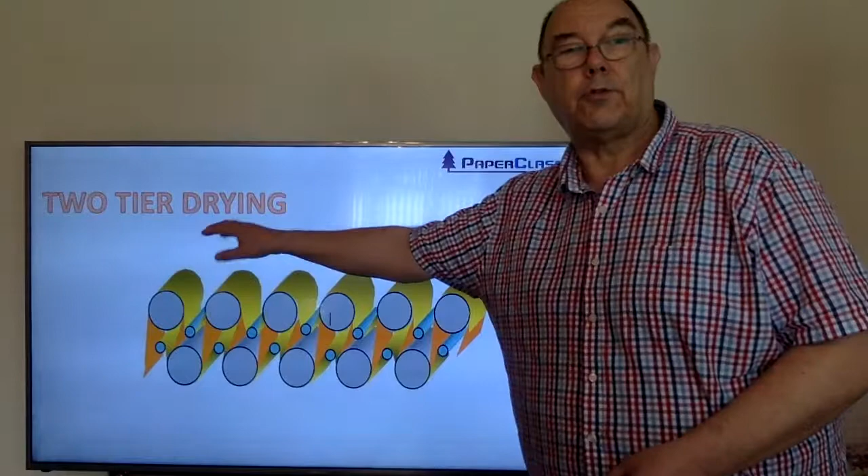In this session we're going to talk about two-tier drying. In an earlier video we've talked about single-tier drying. This is a typical two-tier drying system. We have a top row of drying cylinders with a drying felt on that, keeping the sheet pressed against the top side of the surface. And we have a bottom row of drying cylinders with another felt keeping the sheet on the bottom surface.

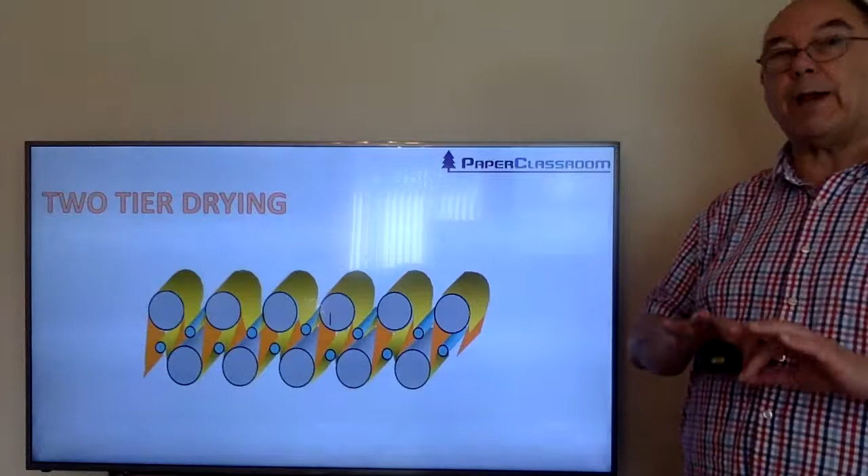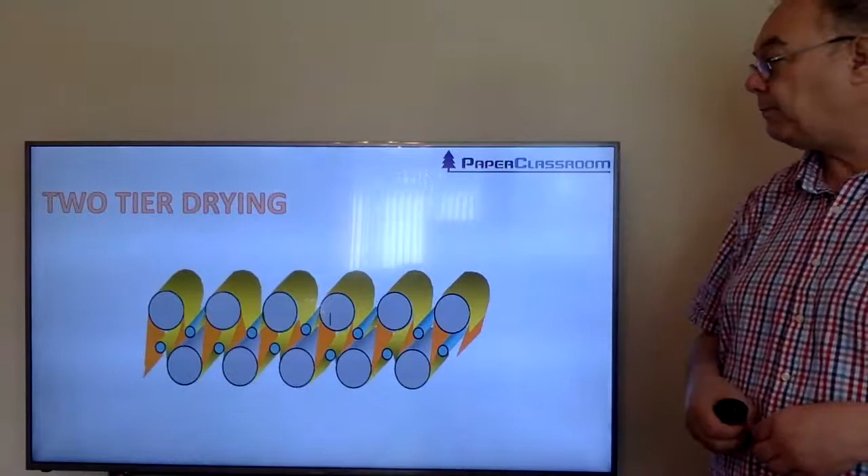Two-tier drying has many advantages and disadvantages. The pockets here and here are a disadvantage because they hold humid air, and unless you make a positive action to get rid of that humid air, it will inhibit drying. You've got open draws here where the sheet can shrink and potentially break if the tension becomes too great. But you've also got good things, like you do dry the sheet on alternate sides and therefore you get a more one-sided sheet.

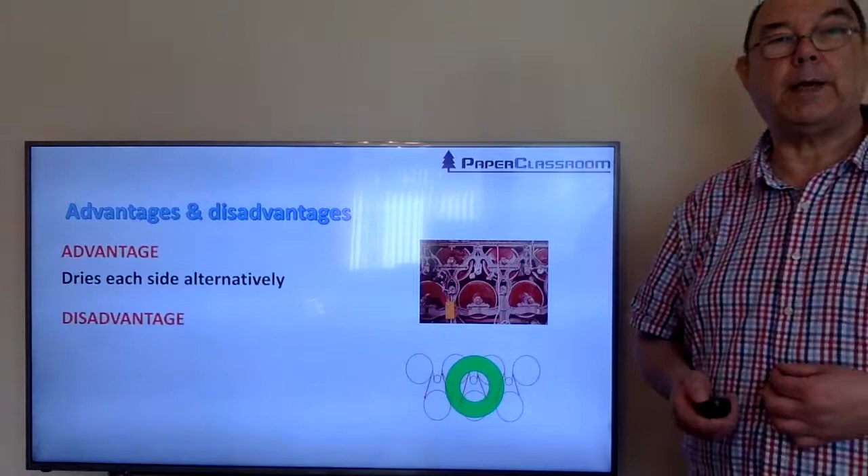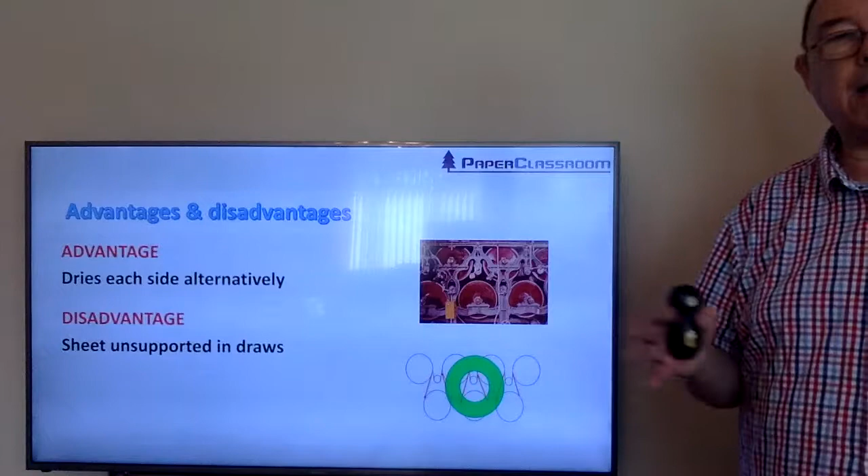So let's talk about these advantages. The main advantage is it dries each side alternately all the way through the system, giving you a nice one-sided sheet of paper. The disadvantage is the sheet's unsupported in the draws here, so potentially it can break. You can get this edge flapping effect that we've talked about in other videos.

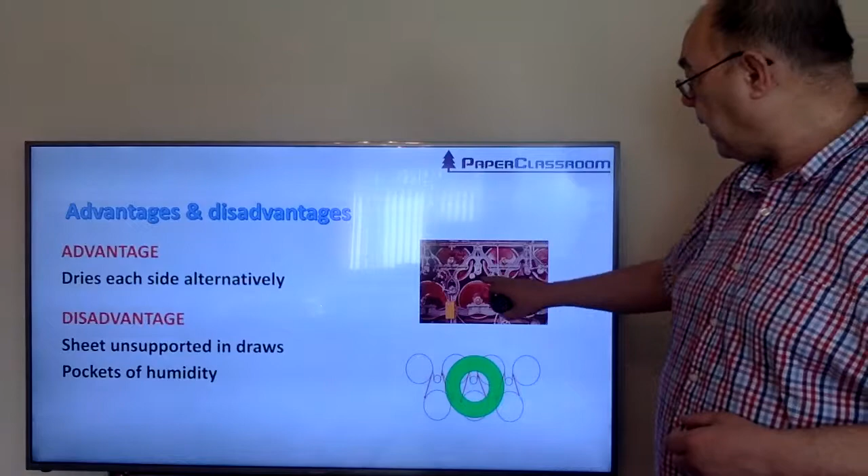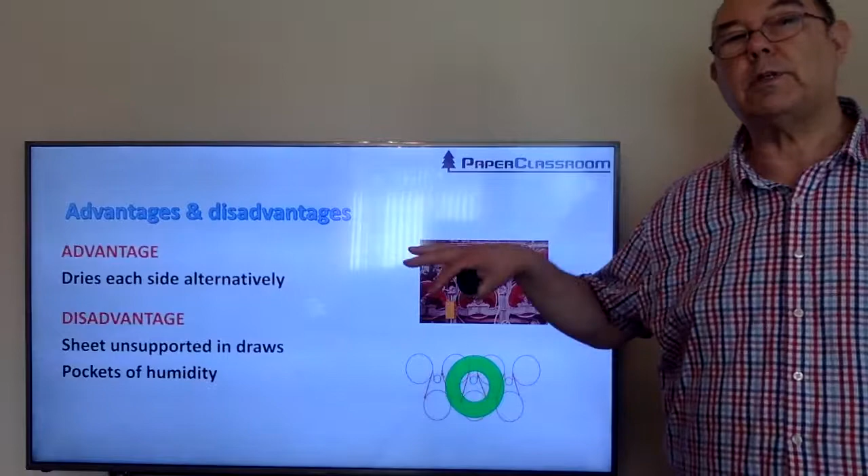There are pockets of humidity, so between here and there and here you've got a bounded pocket. In the case of top drying, you have a top drying cylinder, you've got two sheets of paper, and there you've got a felt roll and the felt, and that space in between the moisture can't get out of unless you deliberately put in something like a pocket ventilation device to push it out. So those pockets of high humidity will inhibit the drying, inhibit the removal of water from the sheet into that space.

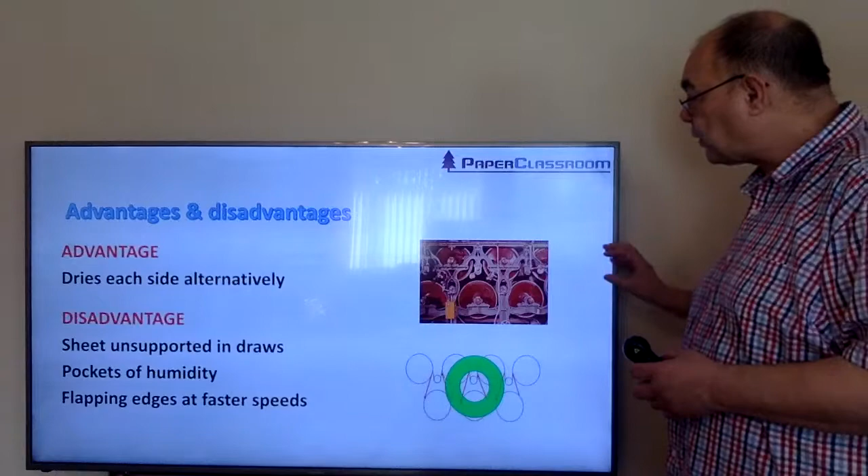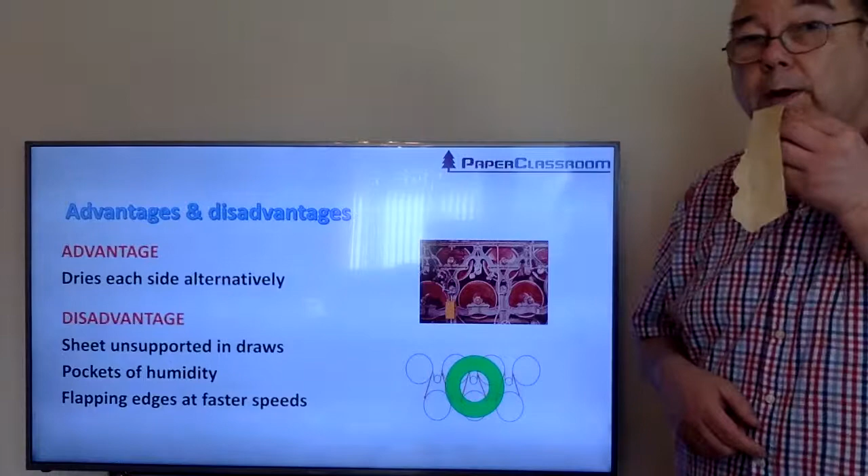Flapping edges is another problem. In these open draws, if you're going fast, then air can pass through the dry fabric, hit the surface of the paper, move along the surface, and as the air moves along the surface, it will cause a lifting effect. Let me give you a little example. If you've got some paper there and air blowing over it, it lifts it up.

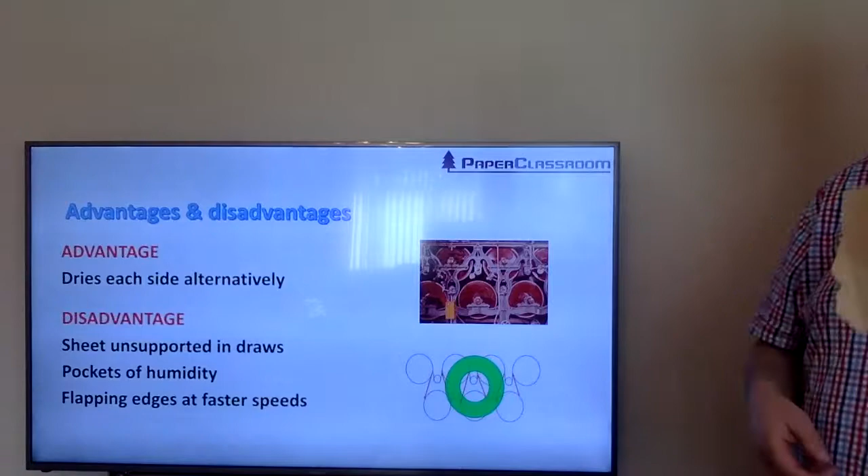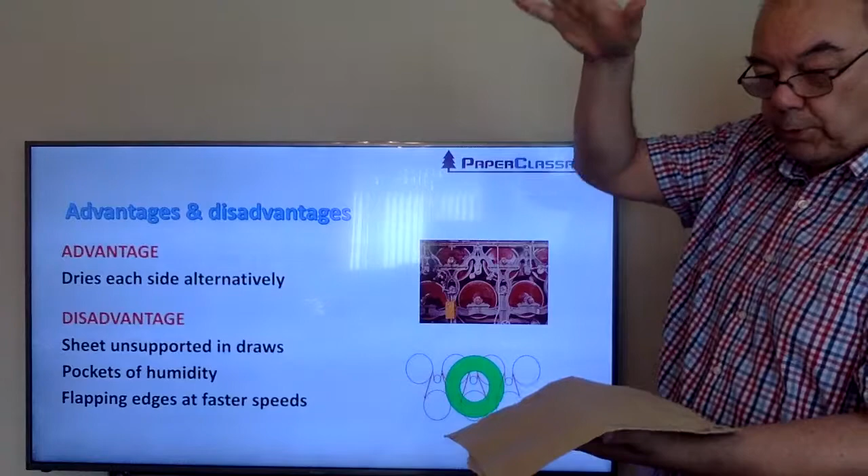Same phenomenon as flying, as keeping an aeroplane afloat in the sky. As air passes over it, it will cause a lift. A similar thing happens with your sheet of paper. If you've got the sheet of paper, the air will come through the dry fabric, hit the sheet of paper, move left and right, and as the air blows over the paper, you'll get these flapping edges. And if the edge flaps wildly enough, then the sheet will break.

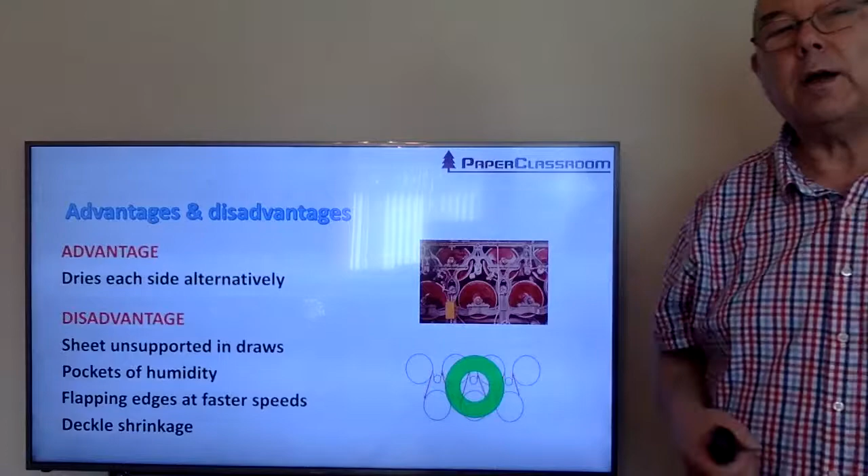The final thing to talk about is deckle shrinkage. While the sheet is being held firmly on the surface of the drying cylinder, it will dry but it won't shrink, provided you've got really good dry tensions. In these open draws between the cylinders, although you're pulling the paper and stopping it shrinking in the machine direction, there's absolutely nothing you can do about cross direction shrinkage. So it's in these draws that all the cross direction shrinkage occurs.

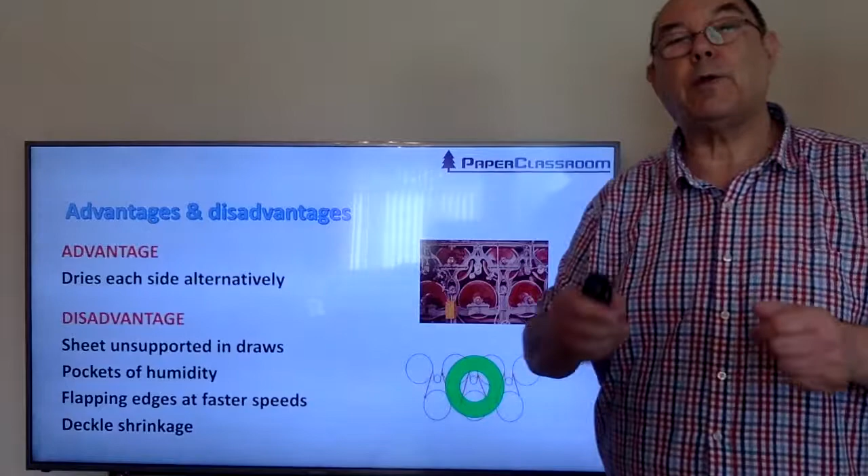Now we look at the features of two-tier drying cylinders or systems. We'll talk about these in more detail in other videos, but we've got the felt systems to consider. There are two particular felt systems we need to talk about. One is the use of slalom felts, and slalom felts eventually led people to the idea of single-tier drying systems. There's also another system where we use felts in a very different way that we call silent drive, where we use the felts to drive the drying cylinder rather than the regular system of the drying cylinders driving the felts.

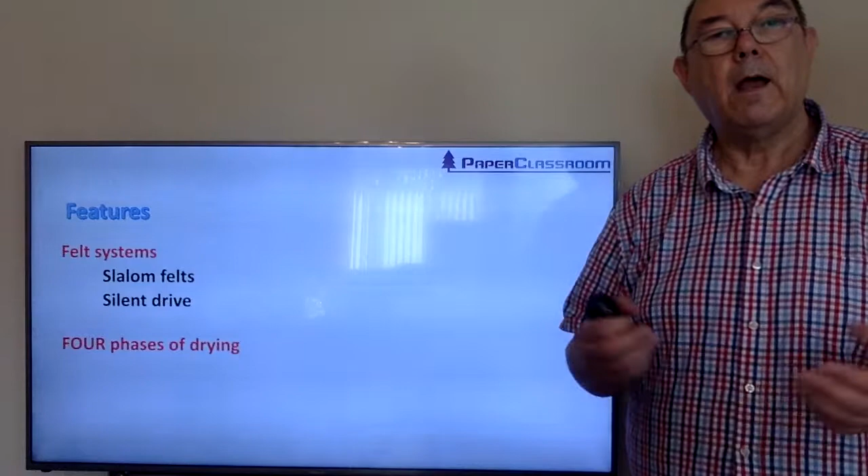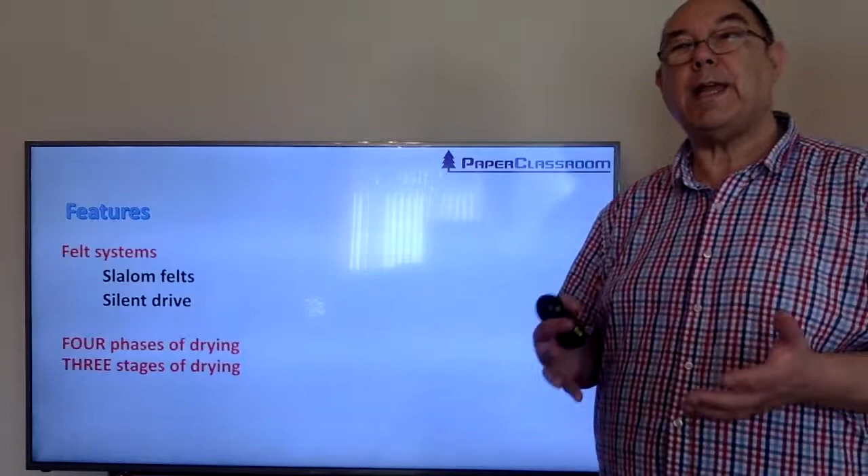There's a very theoretical treatment of drying known as the 4 phases of drying, so we need to talk about that in detail, and then the 3 stages of drying. That's very theoretical, but very appropriate to the level 3 technical certificate. It's something that we need to be able to draw and to explain. And we need to talk about pocket ventilation, the need to push all that moist air away.

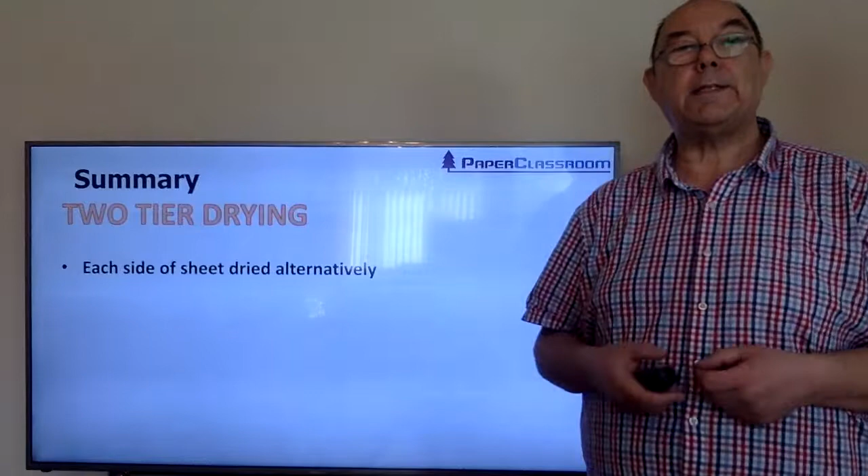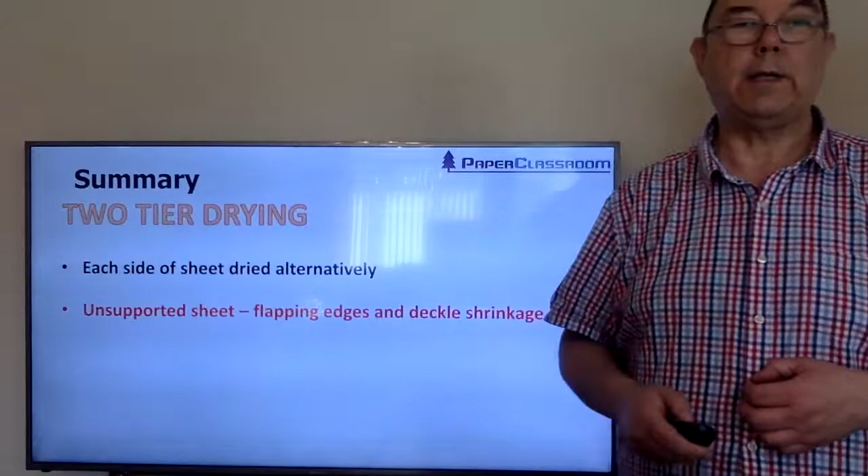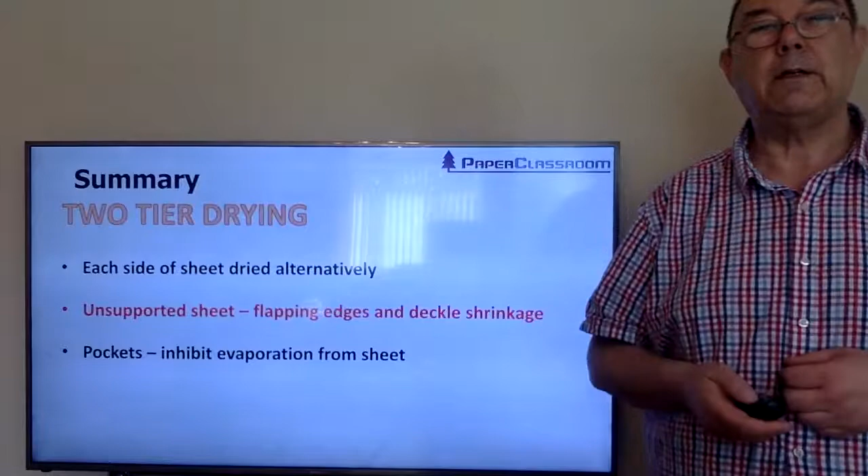So a summary of two-tier drying that we've covered in this session. The good thing is each side of the sheet is dried alternately. The bad thing is it's an unsupported sheet in the draws, therefore we're going to get flapping edges and deckle shrinkage. There are pockets between the sheet, the felt roll and the drying cylinder, so those pockets are going to inhibit evaporation from the sheet unless they are well and correctly ventilated.